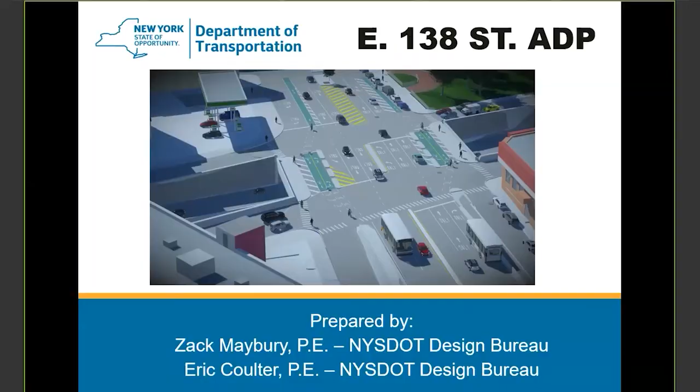So as everybody knows, this is the project location. You can see where my mouse is here. This is the subject bridge replacement, East 138th Street over the Major Deegan. You got the Major Deegan running north to south here underneath. To the west, we have the Madison Ave Bridge.

I'm not going to go into model-based contracting in too much extent, but I do want to give a high-level overview of the process, in case you've never heard of the term before. Model-based contracting is specifying contractual work with a variety of relevant electronic files. You'll hear me keep saying the model and the 3D model, but it's not just that - it's also CAD files, Excel files, alignment files, XML. It's really whatever electronic information we can provide contractually with the plan set that provides a better contract.

Let me see if I can mute this person quick. I'm all right, you know. All right, I think I got him.

With that being said, the overall intent is to reduce or eliminate the corresponding 2D plans. It's not just plainly jumping into this and eliminating every 2D plan that existed prior. We've taken a high-level approach and tried to determine which elements should be provided in the 3D model, and what would really provide a benefit to the contractor and any reviewing agency. It would be very easy to add all this information into a 3D model, but if that's not the easiest way to access it, or if it just makes more sense to have on a 2D plan - such as work zone traffic control, showing simple elements like lane shifts, tapers, closures and work areas - 2D plans still do a wonderful job at showing and demonstrating that information.

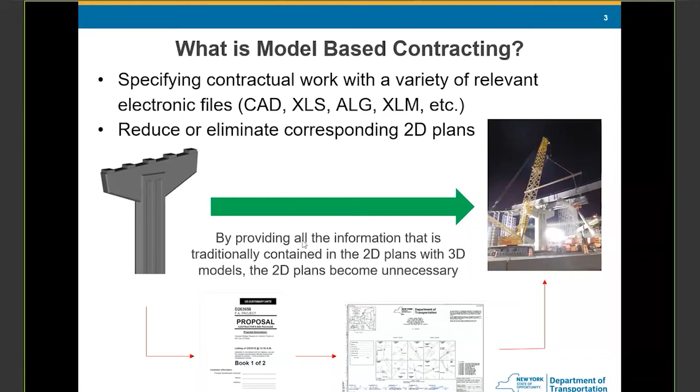The way we went about creating an engineering stamp for these electronic documents - you'll see as part of the plan set accompanying the model, there's a sheet called Electronic Files Identified as Plans, ELE is the drawing number. On this sheet, we list out the different files that will be provided contractually and electronically with the plan set, along with the engineer of record. When this project is put out for letting, each of the respective stamps will be on there as well. This should give you a good overview of the different files that will be provided.

Looking down here at the federated file, this is a supplemental file that we are providing. Federated - what does it mean? Federated is a new up-and-coming term in the CAD environment. It means to form a single centralized unit within which each state or organization, and each organization keeps some autonomy.

So what does that mean? We have each of these contractual files, but what if I want to see more than just the contractual highway work? I'd want to see how the bridge is integrated with that, and potentially even some of the utility elements as well. That's why we created the federated file - it's essentially one-stop shopping, and that's what I'd really recommend for reviewers to open and conduct their review in. The federated file simply references each of these contractual files and puts it in one central location that allows a user to access the information they want, and they can get rid of any information they don't want to see. We'll go through a quick demonstration on that as well.

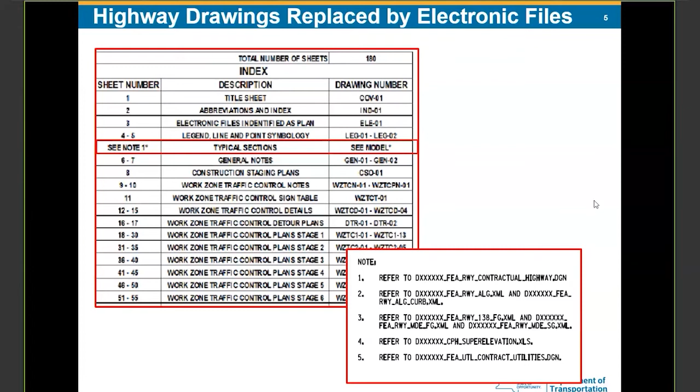So we've included some preset saved views in the model. These are essentially set camera angles that have particular elements on, so that it enables the reviewer to quickly dive into the information they're interested in. You'll see when I pull up the model, there's an overwhelming amount of information if it's all on at the same time. And if a user is looking for something specifically, it would take a lot of work to get to that single element.

So with that in mind, we set up these specific saved views that a user can browse to and quickly retrieve the information they're looking for. You'll also see the saved view list in the model-based contracting special note. I'll touch upon that in a little more detail once we go into the specific files provided with the project. We've also included embedded links inside of the 3D model.

You can picture these as a cell or an emblem inside of the model. For something like a PDF, you'll actually see a PDF icon pop up. I'll go through a couple of examples of these as well. And that PDF icon in the model will directly open the associated file.

For example, if I click on the link to the carrier beam data, I don't have to browse to a listing of 100 different files and try to find the carrier beam data associated information. I just simply click on that link and the Excel sheet or PDF will pop up instantaneously. These are also all included in the special note.

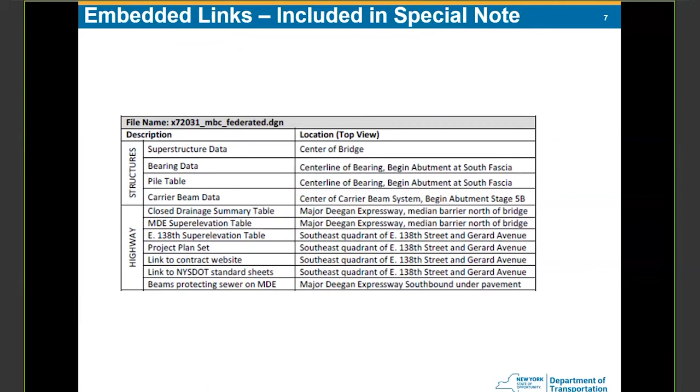Also, part of the special note is our required software to view the model. You'll see that we've provided reviewers two different methods to review the 3D model. One method will be Bentley View. That's my preferred option as a longtime CAD user. It feels very comfortable for me to access the model and look, measure, and get the specific information I'm looking for. However, we've also provided a method called iTwin.

That method uses a link to a Google Chrome web page that enables a user to bring up the model and access it just like you could in Bentley View. However, you don't have to download any software, and the overall feedback we're getting is that it's more user-friendly to someone completely unfamiliar with the CAD world. And that's how Bentley went about setting up that product.

We've created some training videos for Bentley View. Those are on our YouTube page, broken into specific videos. We try to make them 1 to 2 minutes apiece so that they're very detail oriented. You might hear me say something today about levels, but you don't really remember what it was.

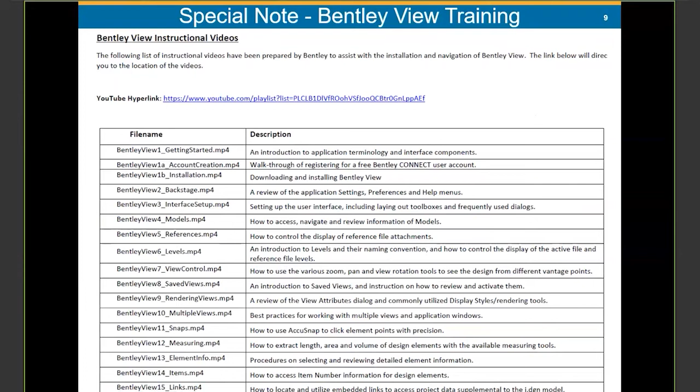And you don't want to watch a 30-minute video to try to find that snippet of me talking about a level. You can just go to the Bentley View video that talks about levels, boom, you get it. We try to make them short and accurate because attention spans aren't nearly what they used to be, and if somebody's got to watch a 30-minute video, they're likely not to. So we've actually included these on our other pilot project as well, and we got a lot of good feedback from contractors.

So now that we went through that information, we're going to do a breakout from here. I want to go through the different files that were provided with the ADP submission. Hopefully this provides some more clarity on the different files provided, as well as answers any questions people may have who already accessed the files online externally.

And I know a lot of people are on this phone call internally as well, and those files will be located on the P drive. Two of the files I'm going to talk about in a little more depth are the quick start guide. I think that's very important for every reviewer looking at this package. It provides a lot of valuable resources, information, and guidance so you can get the best experience from your review, and it answers a lot of questions that people have right off the start.

Secondly, the model-based contracting special note details the level of development for the various figures, shapes, and solids included in the 3D model, as well as what information we can get from the model and what information you should refer back to, potentially the standard sheets or the 2D plan set.

I really want to recommend every reviewer go through both of those documents in their entirety before you start your review, because it's going to answer a lot of questions and hopefully provide more clarity for you during your review. After that, we're going to talk about the 3D model.

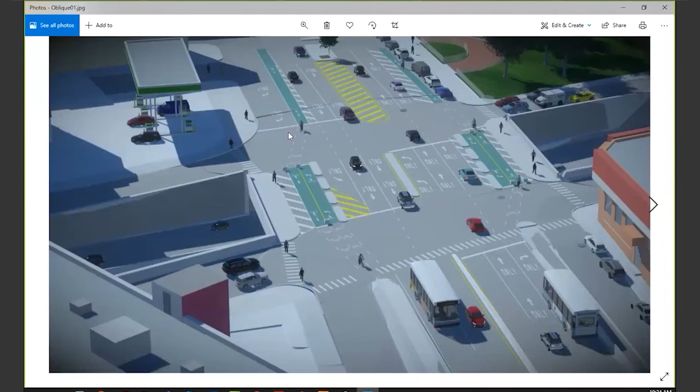So quickly going through some of these documents that you will receive, you have a folder with renderings inside of them. We put together a few different views so that a user can better understand the final condition of our project.

We have the federated file. I'll go into that in a moment when I bring up the model. You have your HC140s, that's for your utilities, and your utility inventory report, that's your HC203.

Like I said, we did provide a 3D PDF that Eric will discuss in a little bit. This is a tutorial on the best practices to use. I think a lot of people are going to like that 3D PDF because everybody's familiar with accessing a PDF.

Not everybody's familiar with accessing a CAD file or a model, and I think that's going to provide a lot of clarity and help get users acclimated to the project. It's really easy to use, and it's got a similar look and feel as if you were in CAD.

I'm going to come back to this quick start guide. Like I said before, I highly recommend viewing this document before you look at the project. This is the actual 3D PDF file. We have the corresponding 2D plans with the project in here as well.

We have our special notes. I'll also come back to this. We have our special notes that are related to the different elements of work in the project, and we also have the model-based contracting special notes embedded in these as well.

And I'll also come back to those. We've included the different special specifications that we've utilized on this project.

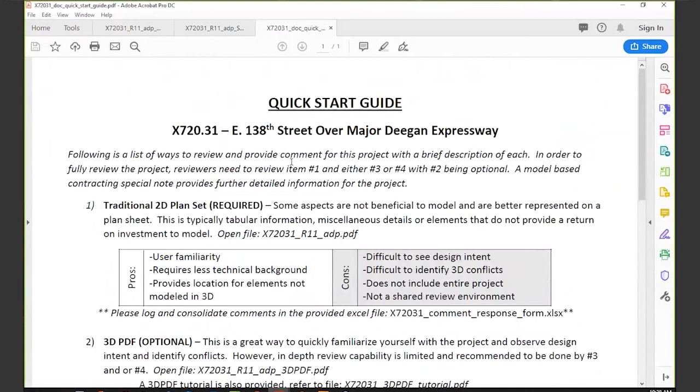So let's go through the quick start guide. This is going to take a user through their course of action on how they should conduct the review. We really wanted to provide this so that you weren't going in there blindly, and this is going to answer a lot of questions.

So the first thing you should review is the 2D plan set. This is going to be a required portion of your review. That's the file right there. Some users are very familiar with 2D plan sets, less technical background, but it's difficult to identify any 3D conflicts, especially with all the utilities on this project, and it doesn't include the entire project. You really need both the 2D plan set and the model together to form a full picture of the project.

This is an optional element, the 2D or the 3D PDF element 2 here. Like Eric was saying, this is a great way to quickly familiarize yourself with the project. I think a lot of users are going to be able to pull that up and feel very comfortable with that document because it is a PDF.

There is a tutorial on the different functionalities you can do inside of that 3D PDF. I would recommend you look at this before you pull up the 3D PDF and use it by the side as you do your review.

But again, it does have its cons. It's not intended to get your quantity information. You're not going to be able to quickly get how much cut and fill is on the project. It's not super easy to turn stuff on, turn stuff off. You can't place 3D comments in there, like you saw this drainage structure that's not in the right location and you want to comment on it. That functionality is not in there.

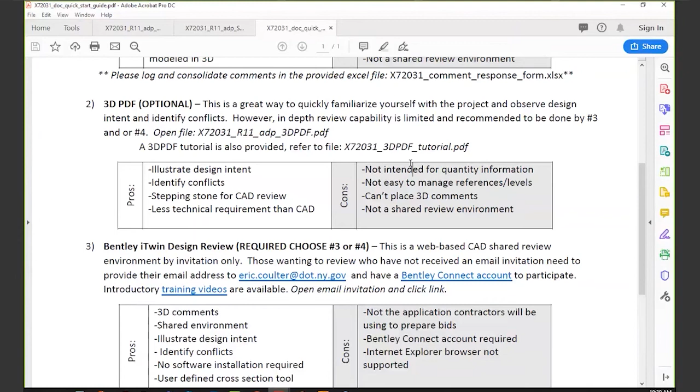So then there's a choice between items 3 and 4 for the model portion of the review. Once again, you have the choice between the iTwin, which would simply be pulling up the link inside of that review document and accessing the model on Bentley's website, or you have Bentley View.

This was one of the things I want to point out again. Those wanting to review that have not received an email invitation need to provide their email address to Eric. He'll quickly get you added. You'll create a Bentley Connect account on your own. And we've also made sure there's some introductory training videos available.

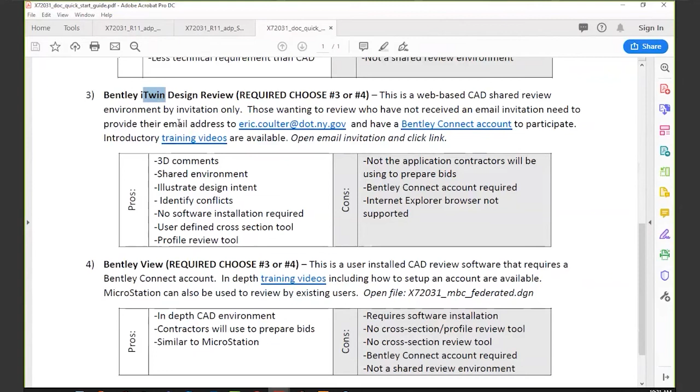I think a lot of users will feel very comfortable using the iTwin review because if you don't have a CAD background, if you haven't used Bentley quite a bit, this is a web portal. You don't have to download any software. You just need to have an account made free of charge quickly, and you can quickly access the model like it was on your C drive. There are some pros and cons on there as well.

And then lastly, we have Bentley View. Here's another link to our training videos, and here's the file that you need to open. Like we were saying, it does require software installation.

So I'd like to go to the special notes that were included with the ADP submission next. You have a lot of the different elements that are normally included with this type of project, stuff from super pave to noise control, but you will see this lastly, the model-based contracting portion.

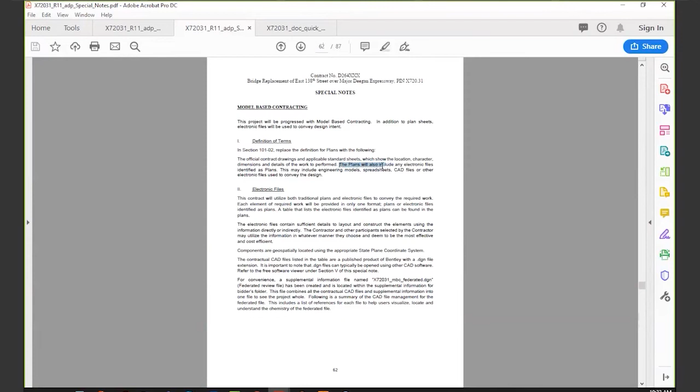So let's go to page 62. You'll get into some of the different definition of terms. We've revised New York State DOT's Division 100 of standard specs because originally the definition of plans prohibited the use of any electronic documentation. And of course, with this project having a heavy amount of deliverables in electronic format, we needed to overcome this. So the definition now reads that the plans will also include any electronic files identified as plans, and this may include engineering models, spreadsheets, CAD files, or other electronic files used to convey the design.

This shows you a breakdown of the different files that make up our federated file. Notice that D numbers are the contractual file. You'll also notice contract in the title, whereas you'll have a PIN, that's the project identification number, and supplemental for files that are simply supplemental provided in the 3D model. That's one important thing to take away as well.

Contractual information is blessed the same way as if it was on a 2D plan set with an engineering stamp on it. Supplemental is purely for creating a full picture for both the reviewer and contractor, like how you would include a record plan set. It's supplemental. Please don't build from this set, but we want to include it because we think it's going to provide additional benefit.

Here's the structure of the references inside the file. Like I was saying before, all of the saved views that you're looking for are located right here in the special note. If a user simply wants to see the abutment, what's taking place during stage 2B at the begin side, all you have to do is navigate to this saved view right here, and it's going to show you that. Out of everything in the model, that's what it's going to bring up for you.

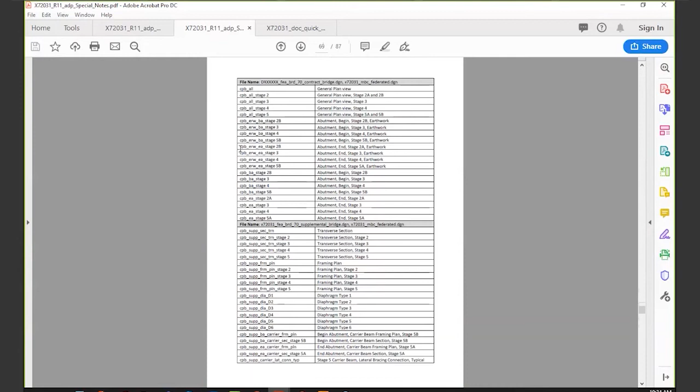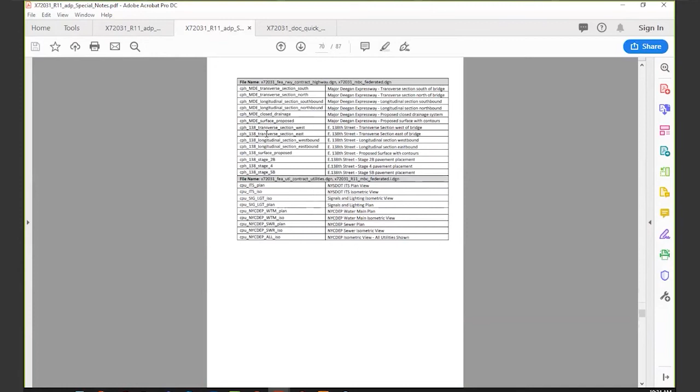Just a quick overview. You have CPB, that stands for Contract Plans Bridge. Those are going to be more bridge elements. You also have CPH, that's Contract Plan Highways. Likewise, you're going to see more of the pavement and drainage work. And then you have CPU, which is your utilities.

Here's some of the different embedded links that were included with the model. We get into the level of development. I don't know if anybody's familiar with that. That's a big term used in the BIM world.

But this is really where you get into the main content and purpose of the model-based contracting special note. This tells the user what information they can retrieve from the model and what information they need to refer to, potentially a standard sheet or the 2D corresponding plans.

So let's go to substructure concrete quick. Each pour of substructure concrete is modeled as one solid 3D element. The level name coincides with the pour number. The following information can directly be obtained from the 3D solid model: elevations, northings, eastings, components, distances, areas, volumes.

However, the following information is not contained in the 3D model. You've got your chamfer details, your keyway details, water stop details, and I need to look at the bridge plan sheets for that information. I shouldn't look for that in the model.

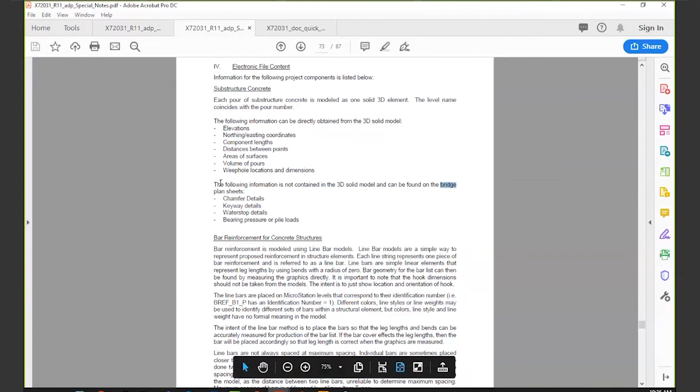That's why I'm saying it's very important to look at the special note before you look at your review, because a user might be like, why is there no chamfer details in the 3D model? Why is this missing? And that same message carries over for every element inside of that 3D model. We try to really break it up - there's not 1,000 different details, but we do break up each respective element in here.

You'll notice here on page 86, here's the link to download Bentley View.

And here is another link to our YouTube site that will pull up the training videos. This is the link that you'll navigate to if you decide to download Bentley View. Very straightforward, just like downloading, accessing any other software that you would download.

Here are the videos that we have on our YouTube page. You can pull up any one that you want based upon the information that you need. They're not terribly long, but I would recommend going through all of them just because it would give you the best chance of succeeding at your review with running into the least amount of problems.

These are definitely, from video 1 to video 3, essential for every viewer that plans on downloading the software, because it really takes you through downloading, creating the account, getting it installed, getting your preferences set up, so you can take it from there.

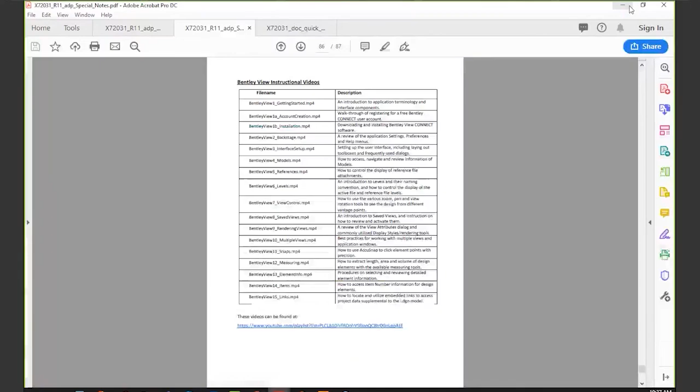All right, so when you load Bentley View, this is the page you will see. You're gonna wanna make sure that your New York State DOT standards is clicked from here, and likewise, your work set is New York Highway Design. That's gone over in those videos as well, but I just want to reiterate it as being important.

It is in my recent file, so I will access it from here. I also want to access it from that folder that we downloaded off the FTP site. So once I unzip that folder, you'll see that you have all these various files in here. The next thing you should do is just go to the README.

The README states to only open the federated file. That's where you can get your one-stop shopping like we were talking about before. If you have Bentley MicroStation on your computer, you can open it using that method as well.

Internal users, if you didn't have MicroStation, we made it so you could download Bentley View from the Software Center. All the files in this folder need to stay in that folder for the references and embedded links to work properly. So try not to remove or change anything in the file.

Part of the setup is running the configuration file. That gets your settings correct so that you're viewing the shapes, solids, and pavement materials correctly, and so everything looks correct. This is also covered in video 1B at minute 1:45.

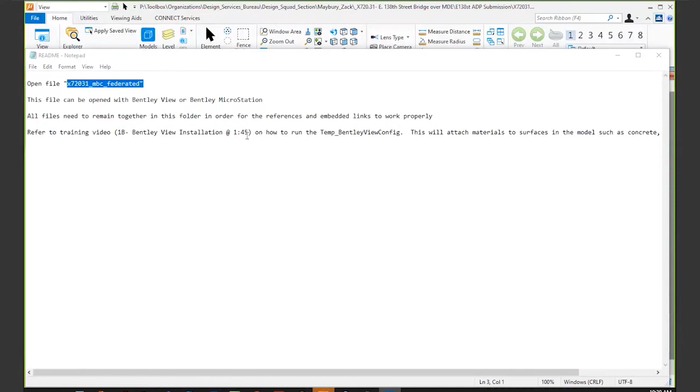So I opened the model here, and you can see, like I was talking about before, there's a lot of information in here. We have the buildings that will help orient a user to the north, but you can see a ton of contours. We have some of those links like I was talking about before.

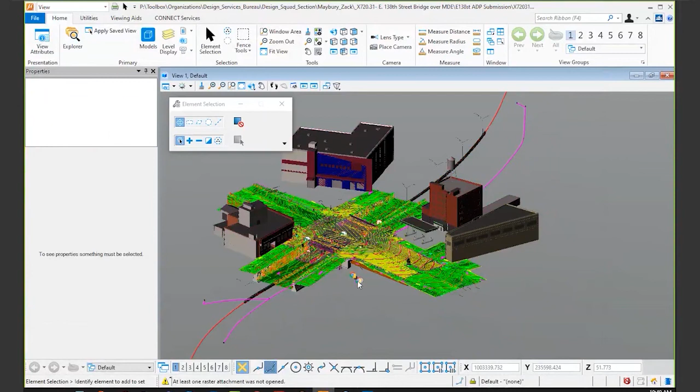Here are those links. These open up web pages, of course. You have some other ones over here, an Excel document, and you've got a PDF document over there.

I could see this being a daunting task for somebody not familiar with opening up a CAD document before. So I just want to get some of the settings set up for your initial time. You're going to want to have your properties open.

That's this box right here. By having that open, when you select an element, it will tell you all of the relevant information for that element.

You're going to want your coordinate system up, the AccuDraw. This search ribbon up here is very helpful for anything that you're looking for. So we want to pull up the AccuDraw.

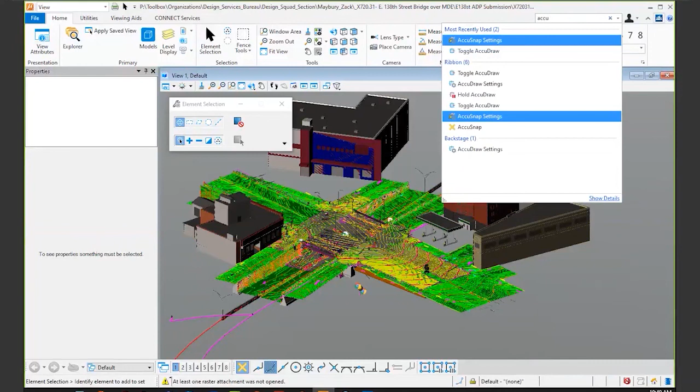Sometimes when that comes up, it won't be an XYZ, it will be in a polar format. So you can see we have an angle and a distance in lieu of XYZ. You're just going to want to click on that and click the key M, and that will get you to your XYZ, which is your grid location.

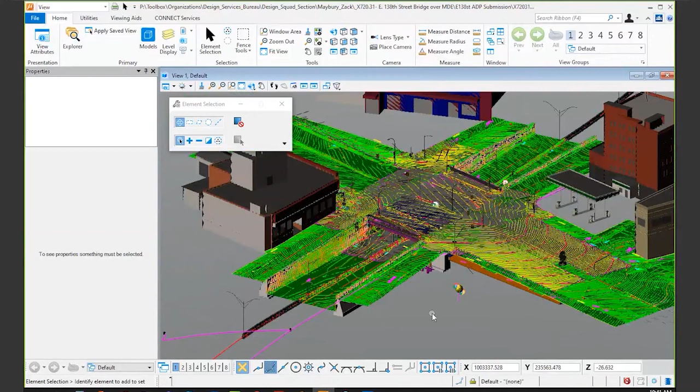That's your elevation, your northing and easting. So if we go to any point and select that, you can see the corresponding information - the Z, the X, the Y - and depending on the element, based upon reading that special note, you know that's accurate per contractual data, or if that's something I should get from the contractual 2D plans.

Some of the other settings - you're going to want to have your snaps set up. These are called AccuSnaps. All you have to do is go into your search again and click on snap mode. These enable you to click on a variety of elements at certain predefined points. Key points allows you to click on only the begin, middle, or end point of a line.

Near snap allows you to select any point. For most uses, you want to measure from end to end or end to center. I would recommend using this key point.

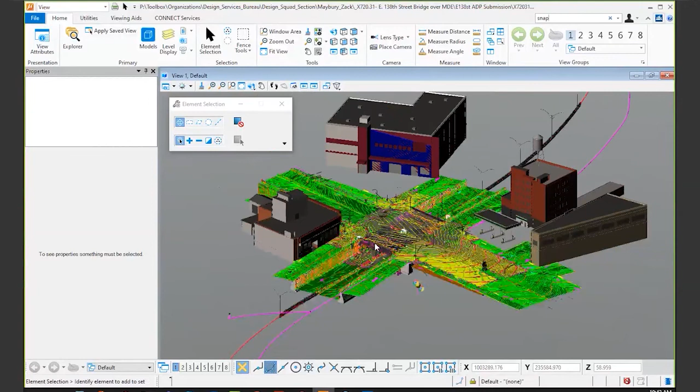Here's your different view toggle techniques. You have your rotation, view previous, zoom in, zoom out. You can also use your center tracking wheel for zooming in and out of the model.

Some of the other important things are your display levels. You're going to want to have this so that you can functionally know what some of these things are and be able to turn stuff on and off. There's different levels in here, and by putting stuff on different levels, it allows the user to turn off stuff they don't want to see and turn on stuff that they want to see.

So if this description's not up when you pull up Bentley View, just simply right-click, click description. A good example of how that's going to benefit you is if I click on a line, you can see that in the background there.

The level that it's on is simply UFO. That literally means nothing to most people, but if you go in here to the description for the right file that it's on, you'll see that that stands for utility fiber optic underground. You're going to get more from that by selecting it via the level display in lieu of just UFO.

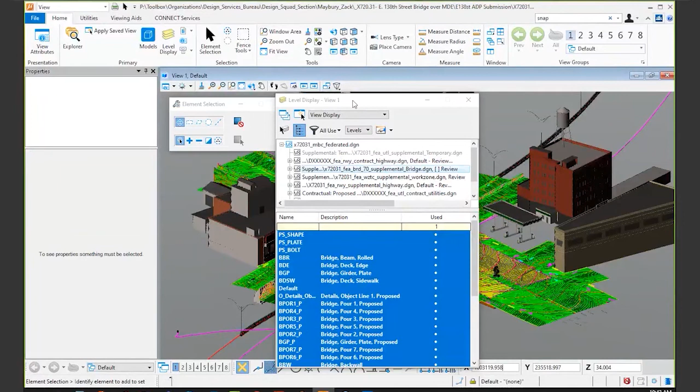So definitely recommend having two screens for a review, but it's not essential. A lot of these tools can simply just be docked off to the side and accessed when needed.

Your next course would be opening up your reference dialogues. Give that a second to load.

All right, it's on my other page here, and I'll bring that over.

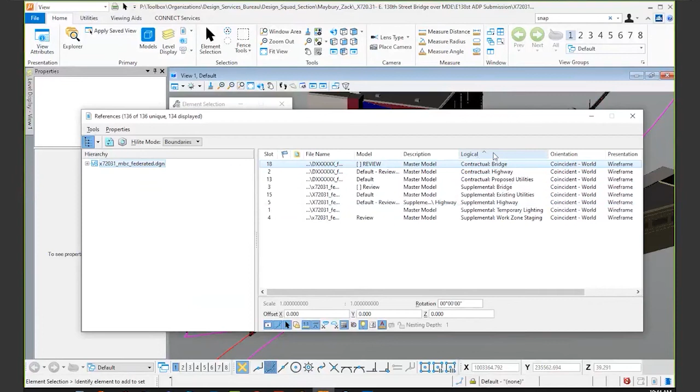First thing, when you open your references, these refer to each of the contractual and supplemental files. You'll notice there's not much information actually inside the federated file—it's simply pointing to other files and bringing in that relevant information. So when you open references, I'd bring logical all the way to the front. This way we can sort by column and quickly tell, okay, here's my contract bridge,

highway, and utilities, and likewise, here's my supplemental information. To toggle this information on and off, you'll want to bring this over so it's visible—that's the display dialog. We can see that if we click this stuff off in here, it's also turning that information off in there.

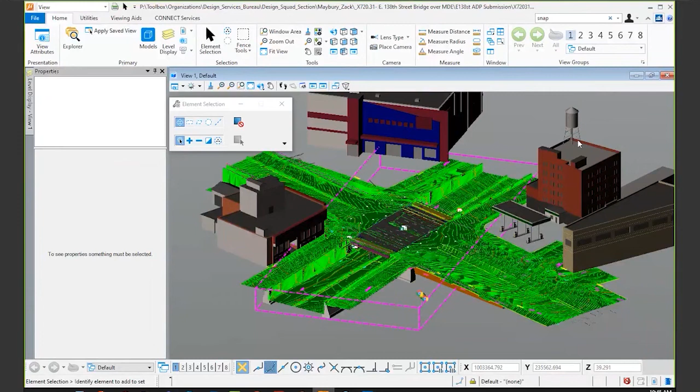And then there's also the tree if we want to get down into some of the references below. Pull back the reference dialog. If this isn't open when you pull up references, you'll just want to click on that, expand it out, and expand the tree. This shows the hierarchy of how things are associated.

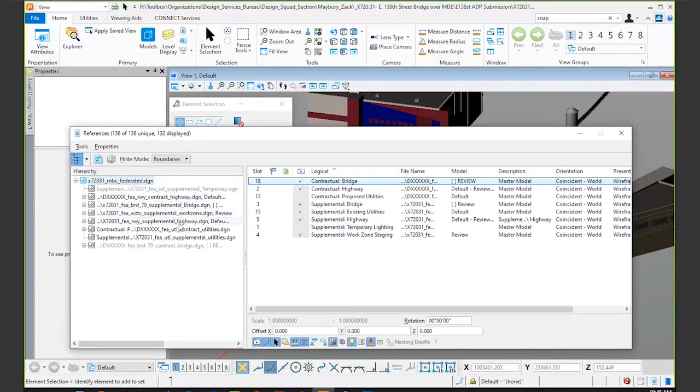Let's say I want to go to the supplemental work or highway stuff and turn off the base mapping. I can just turn off the base mapping, simply by clicking on that and turning it off here. Another important thing is you can't break this. You can get as confused and turned around as possible, but you can't break it.

So you don't have to worry about that. If you accidentally turn something on or off, or change the view in any way, we set up different saved views so you can go back to what you were looking at. I'll show you an example of that afterwards.

So that pretty much takes me through the main things you're going to want to have set up for your review. The next thing I want to jump into is the saved views. This dialog box will pop up right here. You'll see the same saved views that were listed in the special note.

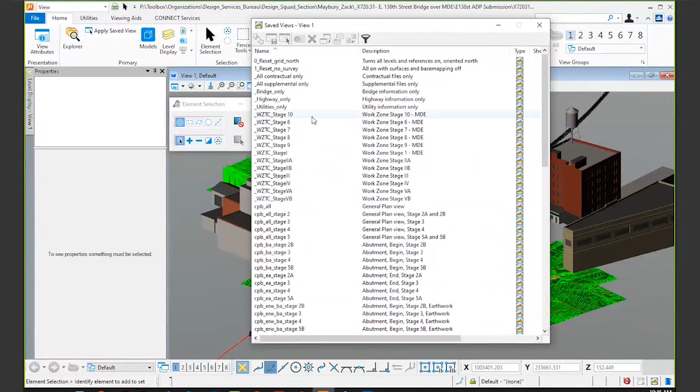Included here, we have some for work zone traffic control, some for the bridge, and some for highways and utilities likewise. I'd recommend just sorting by name so they're all in chronological order. Like I was saying before, there's a lot of information in here, and for me to turn off every specific link, level, and reference to look for something, it might take a lot of work. So we set these up ahead of time.

A good example of this is the work zone traffic control. We included these just so a user can understand in the 3D environment what the lane shifts look like. This is purely supplemental so a user can see this in the model, because we do have the contractual 2D plans to cover this information. But of course, if you're in the model, you want to see how this corresponds to the bridge out there. So we'll just double click on that saved view.

We'll apply the saved view. We want all of these selected, and then we'll just left click, data point, accept, and you'll see that now we have the stage 2A lane shifts in here, and we can see the setup. We've got the work zone over here. I'm going to navigate to stage 5 now.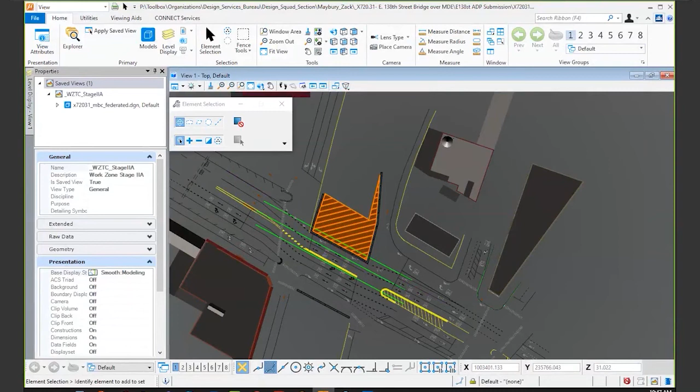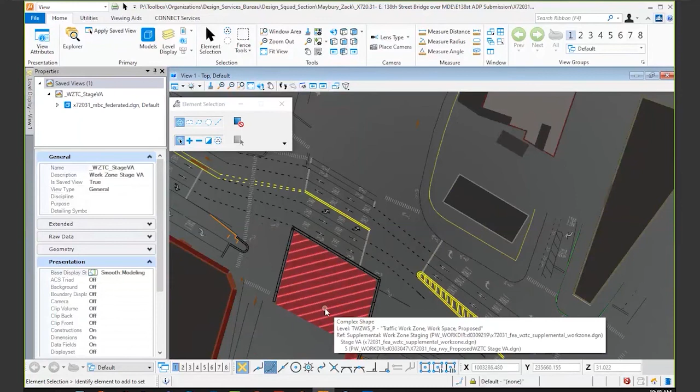Let's see what's going on in work zone stage 5A. So now we can see that the traffic's been shifted up on the north side. We see these lanes traveling west to the Madison Ave Bridge, and these lanes traveling east. We have a turn bay, and this is the primary work environment. We didn't have to include this in the model, but we thought it'd be really beneficial to see this type of information in the model as well.

Some of the other good ones are the bridge stuff here. Let's go to the lateral connection. So we have a big carrier beam underneath the abutment supporting it, and it's got some fancy connections on it. To get to this part of the model, you'd be talking about turning off upwards of 50 levels, but I can quickly just navigate—I did that on the other screen to this reference—and see how that bracing is.

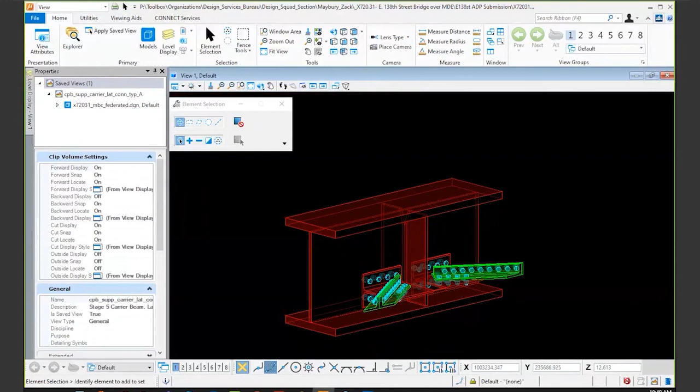And likewise, for some of these other stages, I have the abutment for stage 5B, and this is going to be primarily focused on the earthwork. Same thing, double click on the view, left click to accept, and we can see now, with our element selection command, that we have this solid in here, bridge excavation. Notice the properties is where you're going to get all this information from—we have the structure excavation clearly identified in here, and the item number that it's going to be paid for.

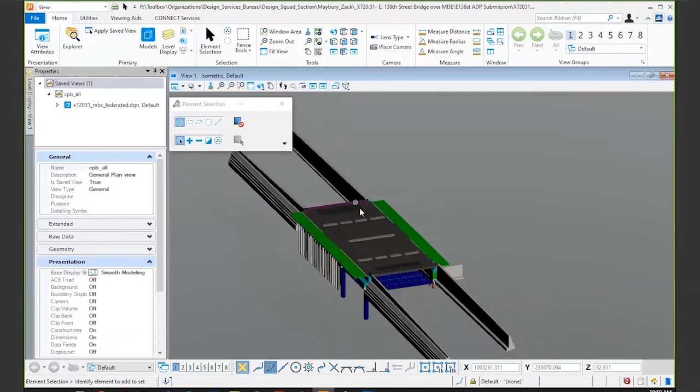But let's go to another view that might be of interest, the various types of diaphragms that are included. If we just go back to the whole bridge contract plan, we can see right now that there are no diaphragms in there. I'd have to take off the deck and remove all this information to see underneath.

Just because we're here right now, we know there are utilities on this project, so let's turn those on to see how those interface with our bridge. We can go back over here to our references, and back up top to our main part of the tree. Give it a second to load.

Let's turn on our proposed utilities now. You can see that we just had our bridge on before. Let's turn on the existing utilities too, just to see how these elements come together in a 3D environment. Now that I've turned those on, we can see that we've added all this additional information in here. We can see we have this sewer system coming through with these different manhole risers.

We have traffic control elements, and all the user has to do is hover over that element and they can see what that is. For example, this is a sanitary line underground. And like I was saying before, this might be too much information for what I wanted to see. I was really just concerned about this.

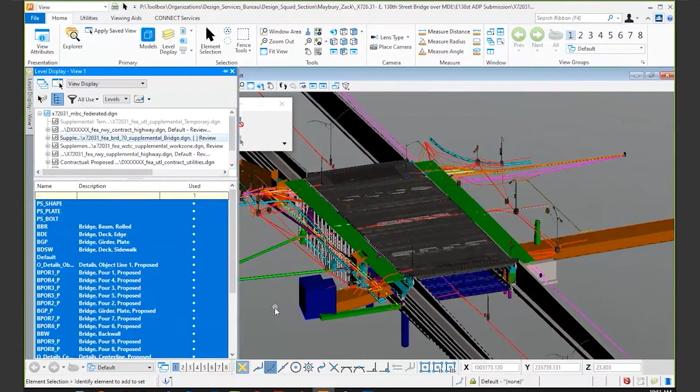So we can go into the level display and click this box right here to turn off levels, or we can just hold the right click, go to level off, and start getting rid of some of this information that we're not interested in. We'll get rid of that, we'll get rid of that. We got a water line, let's get rid of that.

You'll see that in the special notes, this magenta color is elements that are going to be abandoned or removed. We didn't want there to be a duplication, so users could quickly understand between what elements were going to be abandoned and what are going to be the proposed and existing differentiation.

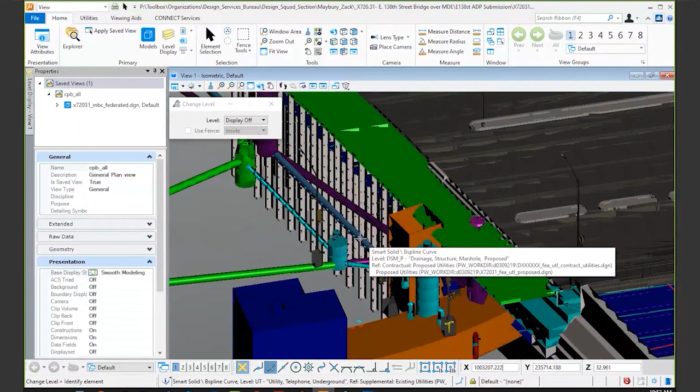Likewise, I can just continue to turn off stuff that is not what I'm interested in, the telephone line, all of this information. And now we can see a much better picture. Oh, I'm not interested in the luminaires or signals. I can turn all that off and get the picture I'm looking for.

Like I was saying before, if we just want to go right back to that, just the bridge, all I have to do is click on that bridge, save view, and boom, we're back to that. Even though we turned off all that stuff and turned on different references, we didn't hurt anything. We can always go back, and we've included a couple at the top just to get you back to everything being on with the grid north, and then another reset.

One second, I'm going to mute another person here.

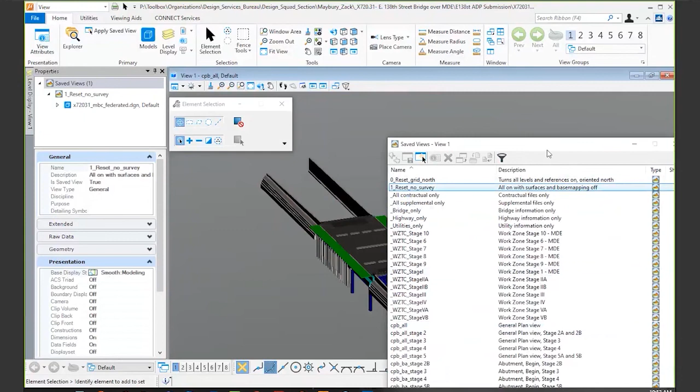All right, perfect. And this will get you back to your starting point. Don't be nervous that you turned off too much stuff. It's going to happen. You're going to get rotated into a position that you're not familiar with, and you want to get back because you have no idea where you are. That's another good element, let me cover that quick.

When I go to the rotation command, we're going to go to dynamic rotation. I can select this cursor and put it on any element, and we'll revolve about that. So we can rotate around, but this is going to happen, right? We're going to be looking like this and have no idea what happened. All we have to do is go back to that contract bridge, all on, and we're back where we were.

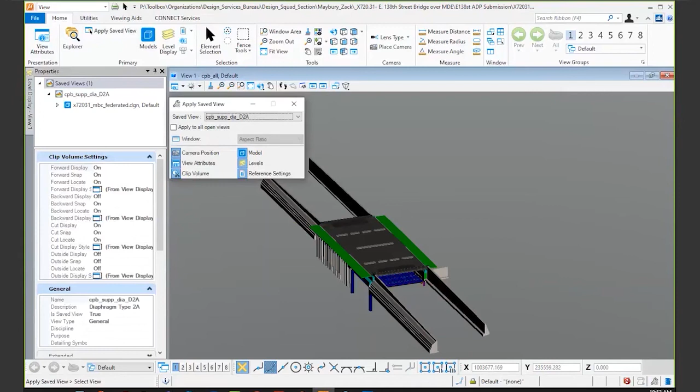I want to dive into those diaphragms again real quick. You can see just by the amount of information I'd have to turn off to see a diaphragm. I could just go to diaphragm type 2A from the save views, and that's it right there. That's the information I was looking for.

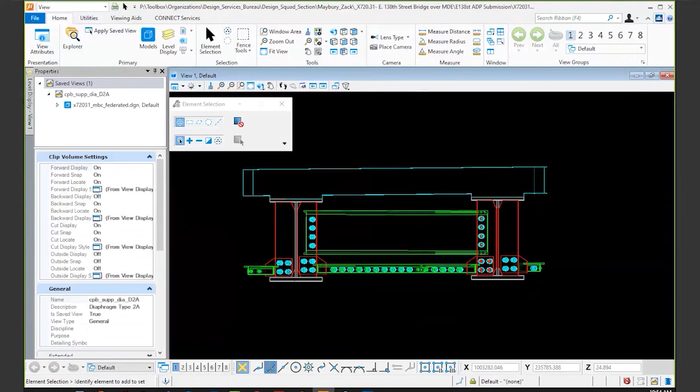I'm going to go through a couple more. We have our highway save view in here. We got an MDE, Major Deegan, and we're doing a little bit of pavement recon down there, PCC pavement, and I want to see a longitudinal section of the southbound.

Okay, we can see we're replacing some drainage structures in here. What's going on with that? What's the item? How are we paying for it? All I have to do is select that drainage structure, and I see this is a type F structure. I see the corresponding frame and the corresponding grate for it.

Likewise, I see we got a curb going in here. What type of pavement do we got? So let's select it. Okay, we got PCC pavement, it's heavily reinforced. This is how we're paying for it.

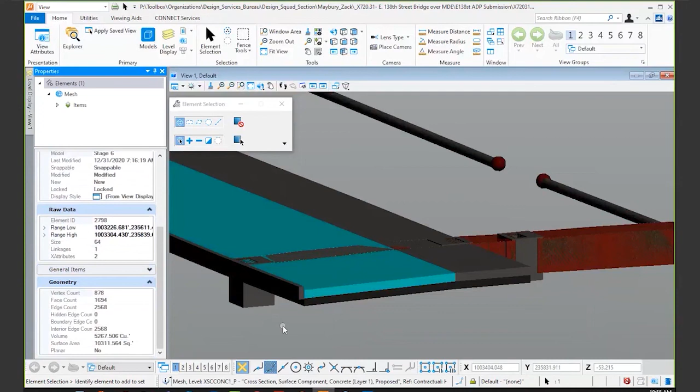And then we have the corresponding information for that solid right here as well. We have a volume, we have a surface area, and we really saw the positive effects of that when the contractor was bidding on items. They could quickly navigate to an element and the pay item they needed to provide pricing for.

So let's go to a utility save view quick. Down here at the bottom, we have the save views. I want to see a New York City DEP sewer isometric view. Perfect, I'm not interested in all the other stuff, I want to see that. So I double click, I click accept on the screen, that's a left click. I'm going to move this off for clarity. All right, let it load up.

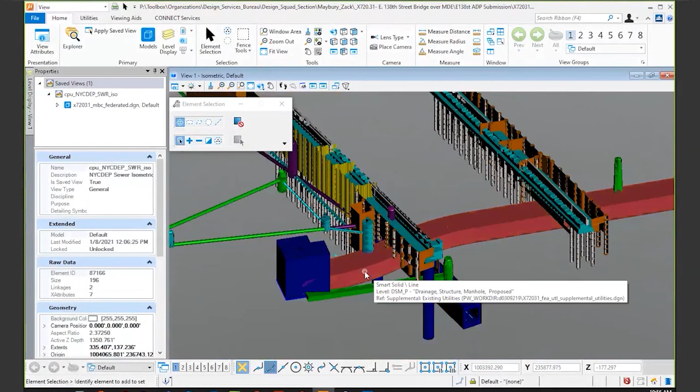And now we can see here's the sewer, here's some of the New York City DEP entities. We have how we're abandoning this sewer location, and this is our new proposed location right here. Just by hovering over it, you can see that this is a drainage feature right here, this is a combined system, this is a regulator. Like I was saying, all that information is right here and readily available for a reviewer.

So some of the other stuff, let's just see all of the utility elements. So I went to the utilities only save view. We can see all of the various items that are included in here. We saw enough, let's go back to the main view and get a good overview of the project.

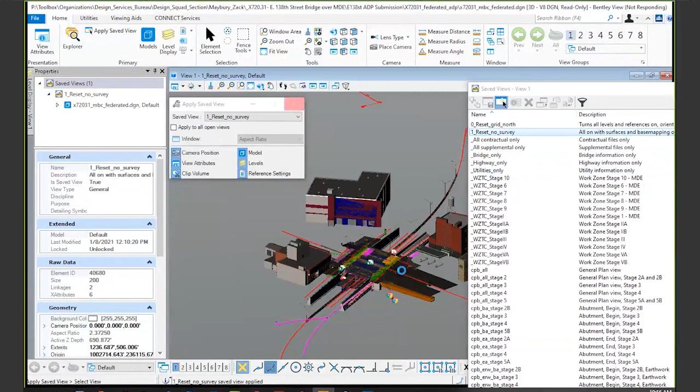So now that we're back at this position, let it load for a second. Let's go into some of these embedded links. We see that over here, I got a PDF, can't really tell what that is. Let's go ahead and rotate over there. Remember, we just move the cursor, select it on the corner, and we're just going to rotate around.

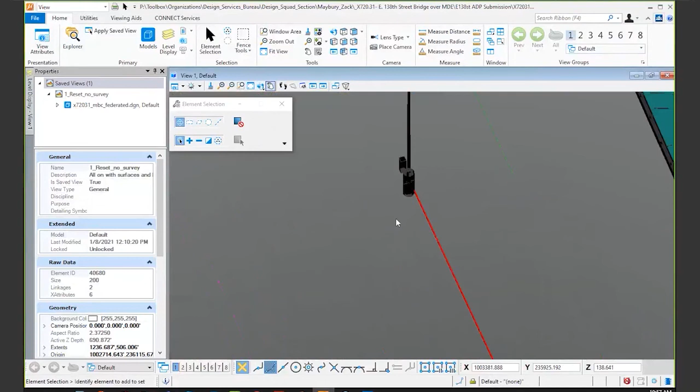Okay, that looks like it's on a drainage structure. What documentation we got there? So I'm just going to hover over that. It says we got a data drainage table. Okay, let me go ahead and open that file. Instead of having to navigate through a ton of different files to look for this, you have the drainage table right here for your use. You can see the slopes, lengths of pipes, and the various nodes that were utilized.

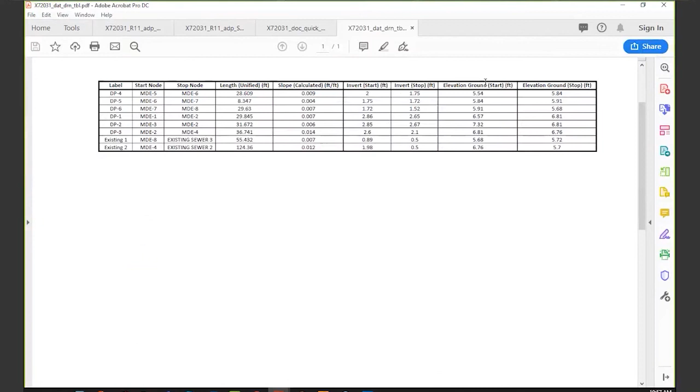And once again, I can see that drainage structure, but how's that getting paid for? You have that information right here. And that really covers a lot of the different elements.

If you click on a luminaire here, you can see I can select it with the background, and you have that information right there included. That was one of the techniques that we used to overcome the fact that we would simply just call this out with an item number on a 2D plan set, but with this being in 3D, we don't really have that opportunity. So that's the way we plan to convey not only information like that, but you'll see on some of the various elements we've included designer notes.

So all you have to do is select the object, and you will get more information over here. You'll see different stuff as far as the volume for specific excavations or pavement placements, or some things such as item numbers, or bringing the reviewer's attention to maybe a record plan set.

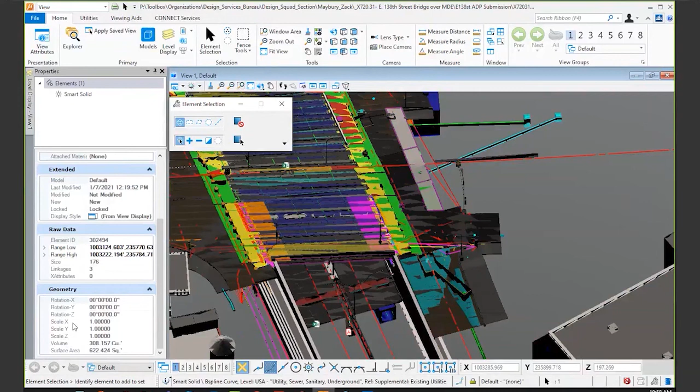So, Eric, I think that pretty much wraps it up for what I wanted to cover. Can you take control and go into the 3D PDF in iTwin from here quick?

I think I muted everybody, so I might have to unmute them. Can you hear me, Eric? Yeah, sorry, I didn't mute everybody.

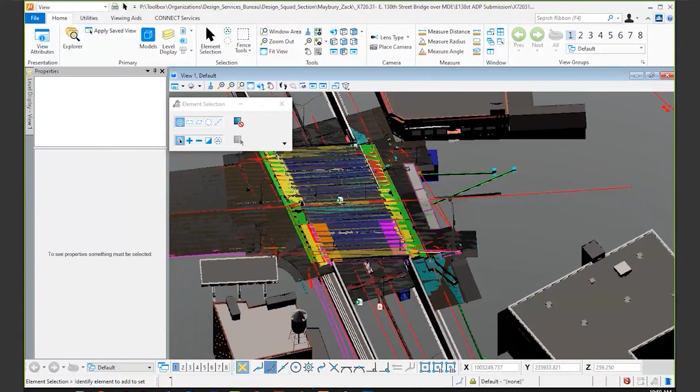Just to reiterate, this is a good place to come back to make sure you got all the required information you need. So item number one here, this is typical, this is what we traditionally deal with. And on our first pilot project, we offered Bentley View as a way to review our model.

You'll see we've since added a couple additional methods for review. These are kind of just feelers. We're piloting this Bentley iTwin design review with this project. We're just looking for additional avenues to review our design and to offer reviewers additional ways to look at it.

That 3D PDF, as Zach mentioned, is a great way to just get familiar with the project, and I'll cover that in a second. Just to help us going forward, Zach mentioned the questionnaire. Please do fill that out just so we know if these things are helpful for you guys to do the review. We want to streamline this process and provide reviewers with the best information possible to conduct their reviews.

So with that, I'll jump into this 3D PDF tutorial. We didn't want to just throw a 3D PDF in your lap and have you try to figure out how to use it. So GPI put together this 3D PDF tutorial on how to get set up in here.

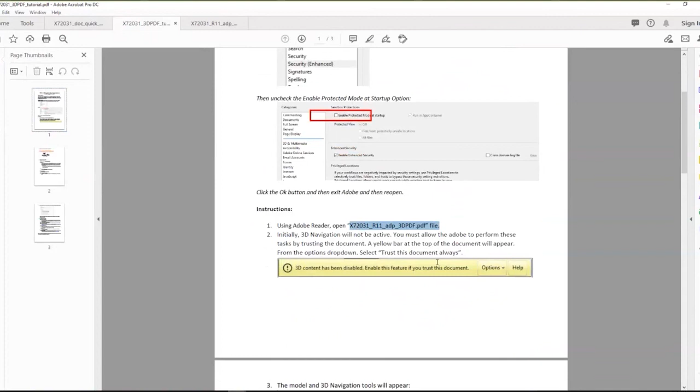There's a couple settings that you're going to have to apply, and you'll see when you open this file, your 3D PDF file, you'll be hit with this trust document prompt. If you just go in and click options and trust it and give it a few seconds, it'll load up and you'll see what I'm showing here, and you'll get all your navigation tools up here on top. This document just goes through what all these toolbar functions are, and it's another good reference once you get in there.

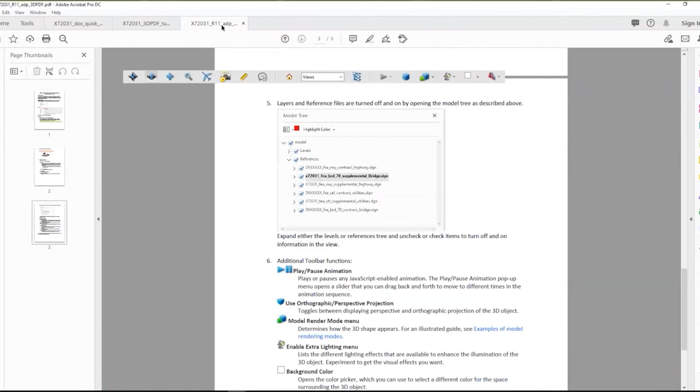So I'm going to go ahead and pull up this 3D PDF, and this is what you'll be looking at once you get into it. This is printed right from our federated model. So what Zach just showed you in Bentley View is what you're going to see in the 3D PDF. As he mentioned, PDFs are pretty standard in the industry and everybody's pretty comfortable with them, so it's just another thing we wanted to try and see how it worked out for everyone.

I'll just go over a couple of things here. You've got your panning and your rotating commands here, and if I just click on that, I can rotate around the model pretty easily.

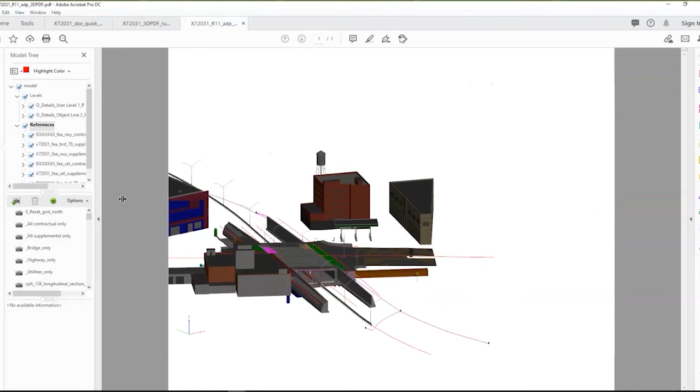Another thing that you're going to want to have at the ready here is your model tree. If you click on that, you'll notice over here on the side you'll get a list of all the levels and references in the model. So kind of what you saw in Bentley View, where it creates this model tree as to how this federated file was assembled. You can turn stuff on and off in here, and if you don't want to see all that information, you can isolate and just get down to what you're looking for.

You can zoom in, you can pan around, you can change your renderings, how you want to see it, whether it's a wireframe or a smooth model, which is shown here.

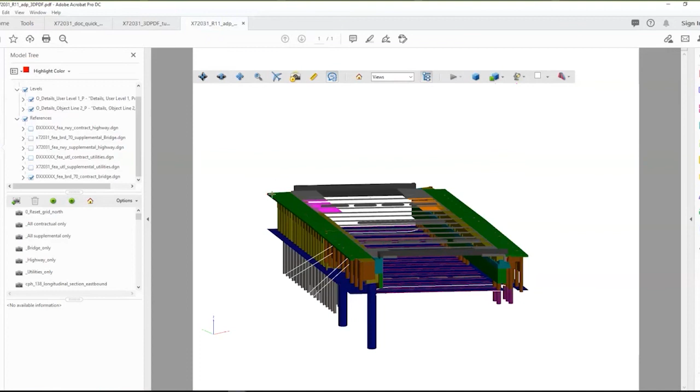The other thing that you can do in here is place comments, 3D comments. So this is another acceptable way to comment on this project. You can just come in here, you can snap to an element and say whatever you want, hit OK, and it'll place the comment. When you rotate, you'll see your comment kind of sticking with you, and then you could just go ahead and save it and submit that as part of your review as well.

If we go back into that tutorial, I just want to point out that it's the best thing if you want to go in and just get comfortable and maybe make a few design intent notes and identify some conflicts in there - that's a good place for it. One thing you don't really want to do is get in there and try to measure and grab any quantity information from it. That's not really the intent of the 3D PDF.

But I think that pretty much covers that 3D PDF. Again, it's just another tool that we wanted to provide and see how it works out for reviewers.

So as I mentioned, I'm going to move into this Bentley iTwin design review. This is something we're piloting. We've never used this before on a DOT project, but again, we're looking for ways to make this review easier. And the way this is set up, one of the benefits is it's a shared review environment.

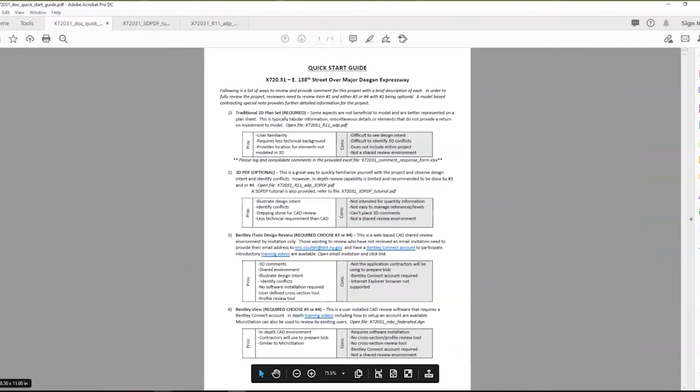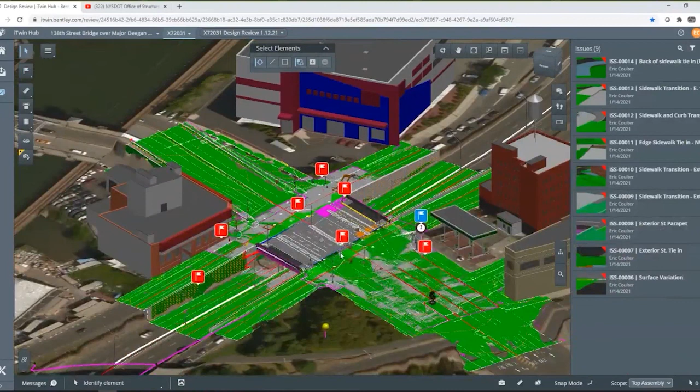Just to give you an idea of what you're going to be looking at when you get in here, I'll hit on a couple of these things. This one right here is going to toggle on your issues. So this is how you're going to come in here, find something you want to make a comment on, and place an issue, and that's what you're seeing here with these flags.

So these are all comments that I've made in here on this project. It'll list them all here on the side. If you don't like to see those flags, you can turn them off. You can turn them back on, and you'll start seeing everybody's comments start populating in here. Right now, I'm the only one that's made comments on this project so far for NYSDOT, so that's why you're only seeing mine in here.

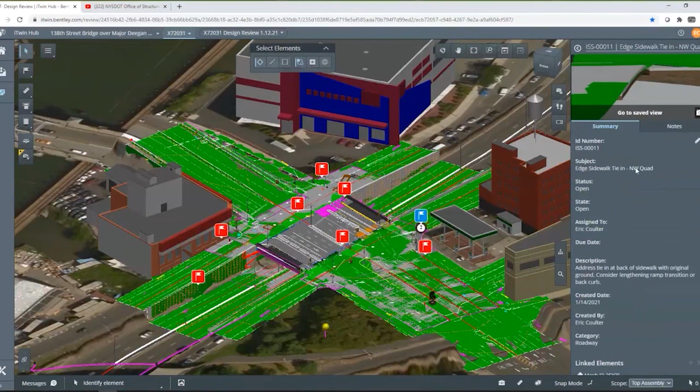But if I want to see specifically what I was commenting on, I can go take a look at it. So I just place the comment here. It'll create a saved view of your comment, showing what you were looking at when you made the comment. I've got a description here of my comment. I can go back and take a look at some of these other ones I've made, and I can place measurements in my comments when I create my saved view. It's just a good way to convey this information in a shared environment.

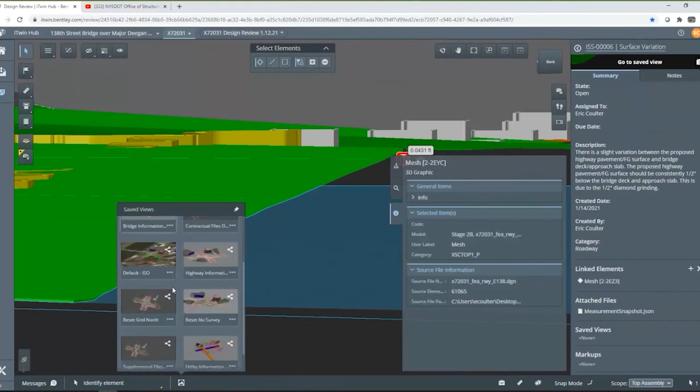We do have some saved views in here. These are not all of the saved views listed in the special note, but there are a few in here just to help you get oriented. So this is just all the bridge views right now that I'm showing here. I can turn these markers off for some clarity. Some default view, just an isometric view, got some highway information, utilities, and of course once you get upside down and inside out, you can come back and hit your reset grid north view.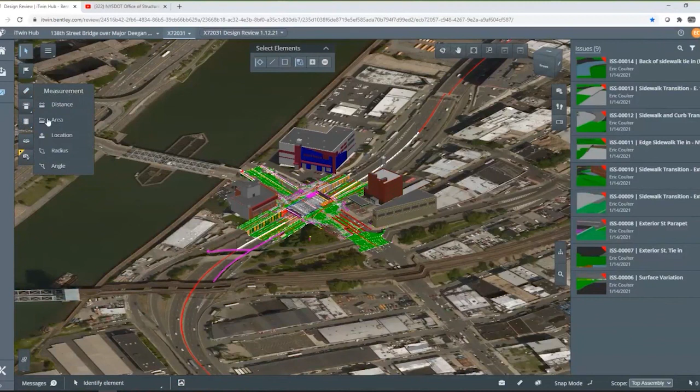There's some tools over here, and we'll go into more detail on this in the training videos, but just to run through them real quick, you've got your measurements. So if you want to come in here and pull some tape and get some angles and areas of certain shapes, you can do that. You can cut some sections. You can view a profile of a roadway, which is a very powerful tool and something that you can't get from Bentley View. So that's another reason why we wanted to pilot this.

You can cut some cross sections. You can just come in here, if I go to like a top view, I can just do a 2-point cut, cut a cross section. It'll take a second to load up here, but there's my section of what I just cut here. And one thing that's nice is you can move this around and it'll update that section.

You can measure in here, and then you can also create a comment from this view as well. So that's pretty handy.

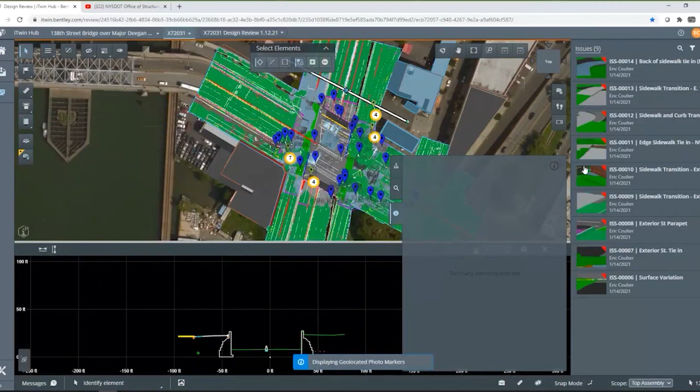One thing that's neat too is, you have to be in the top view for this to work, but there's some geo-referenced photos in here from a site visit we made to the project. Once we load that up, we can close that. We can minimize some of this to get it out of the way.

Where'd they go? There we go. And I can just come in here and click on these, and they're geo-referenced photos. So this is what we were looking at when we took the photo.

It'll create a new tab each time, so you'll just have to close that out to get back in the model. But you can go ahead and check some of these out if you want to get a little bit more familiar with what the project looked like at the ground level.

These are your rotate commands in here. You can just come in and grab a point and rotate, and you'll see what I mean with these geo photos being in the top view. I can just turn those back off.

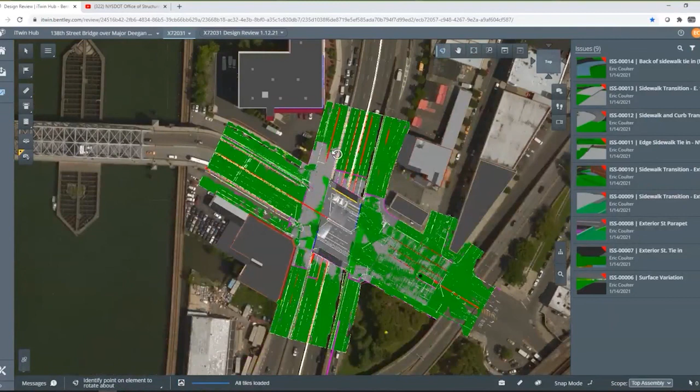There's a fit view, there's previous views. You can just hit this to get back to a quick top view. You can use this tool to kind of walk around, walk through the model, fly through the model. They have different options here.

Over here we have our model tree, similar to in Bentley View, where you've got your references. That's basically this dialog here. This is under your model tree, and you can turn things on and off.

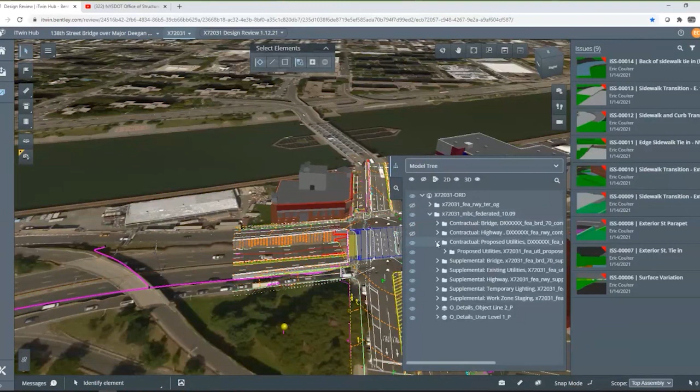So I can turn off the original ground. I can come in here and turn off - these should look very familiar from what Zach just showed you. So you can start turning off some of these and expanding out some of these model trees as well. So like the buildings would be under here. I can just turn those off if I don't want to see those.

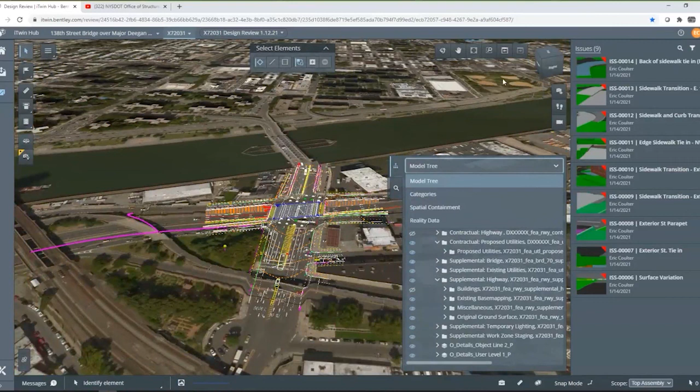Let me get back to the top view. I'm just going to go reset my view. Grid north.

And you'll see that we have this, it's called reality data, where it's bringing in a Bing map. You can turn that on and off in here as well, if it loads up here for me.

And you can change that as well. I had the aerials shown, but close that back up. There we go.

So I have that turned off. I can turn that back on. You'll see these three little dots here, so I can change this. Right now I'm in a hybrid view. I can go to just an aerial view or a street view.

So that's handy, and you can also turn on the terrain. So that's just pulling in some USGS terrain, just like you would see in Google Earth.

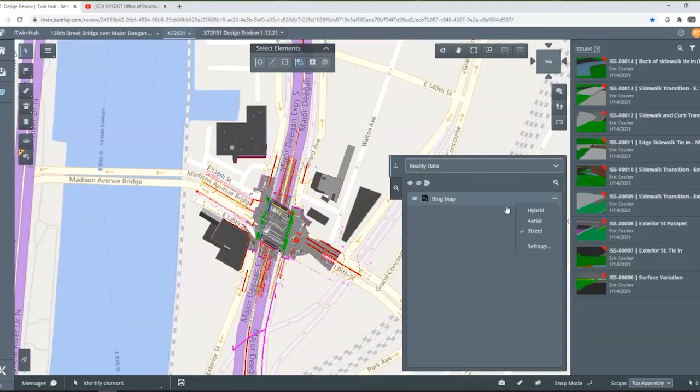So when you rotate, you'll be able to see. Let me just rotate this. You'll see some terrain associated with it. So if I zoom in here, you'll see this is elevated.

Another tool you're going to want to use is, if I click on an item here, let's zoom in here to, let's say, this barrier. It's going to give me the properties, and I can just click on that, and it'll tell me more about this individual item here. So just some additional information there.

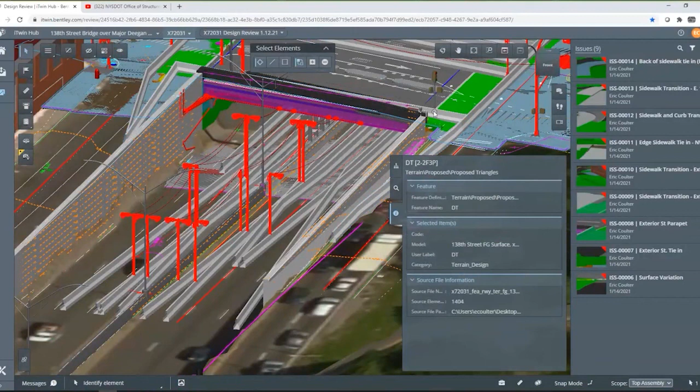But that's pretty much the iTwin, just a quick overview of it.

I'll just show you how to create an issue here. So you can just come in and click on something and you'll be prompted with a form. So this is what it's going to look like.

So I'm in a NYSDOT internal review - I'm calling them a silo - so like New York City DOT, you'll have your own form. So that'll pop up, but it'll look just like this.

You can type in your subject, what you're seeing, what you want to comment on. You can assign it to a category, and this will help us filter the comments on our end for when we go to resolve comments. So you make your description, and you can upload a file if you want, some supporting record plan information, for instance, and then you hit save and it posts your comment similar to these.

So I think that pretty much covers the 3D PDF and the iTwin design review.

One thing I'd like everybody to try: it's pretty easy, just click on a link. Once you get a Bentley account set up, whether for Bentley View or iTwin, you only have to do that once for either program. So if you've already set it up for Bentley View, just click that link and it'll bring you right in. Just a reminder, you have to use Chrome browser, it will not work with Internet Explorer.

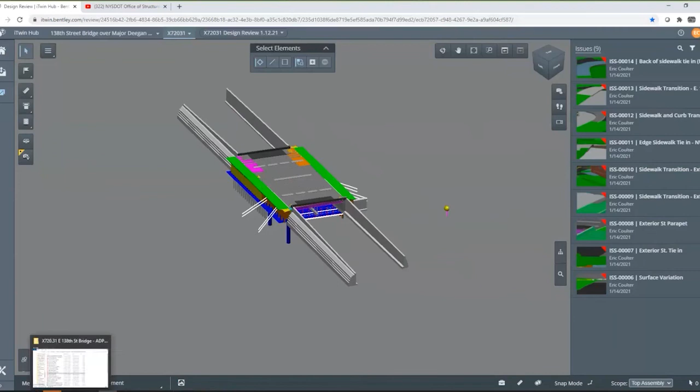It is a lot of information. I think one of the things to keep in mind is just focus on something small. It's a lot of information when you get into the CAD environment, so focus on a small area and turn things on and off, and I think that'll help you out with your review.

All right, thank you very much for showing those, iTwin and the 3D PDF, Eric.

Lastly, I wanted to show the video that our consultant on the project, our teammates at GPI, put together for us. The staging on this project is pretty sophisticated. I think the bridge is being replaced in 5 separate stages alone, and then likewise there's another 5 stages for the Major Deegan and reconstruction taking place below. I know a lot of times, specifically for me, when I'm reviewing a new project and looking at all these different lane shifts and work zone traffic control plans, it's kind of difficult to orientate yourself and figure out what's actually taking place in each stage.

So I want to show you this video real quick. I'm just going to go through the first minute. There's an MP4 of this provided on the FTP site, and there's also a link to this same video on YouTube. One quick thing, if you pull up the YouTube video, I'd recommend you go to settings and turn the quality up to the maximum possible. For some reason it defaulted to the minimum when I initially pulled it up, and it didn't really look too good. So I'm going to go ahead and play this video.

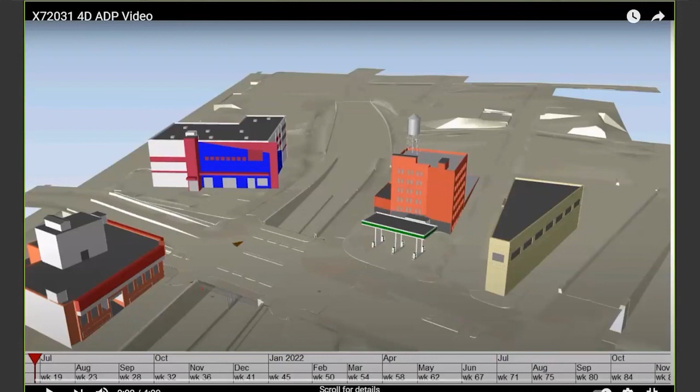We were viewing north, you can see where the buildings are. We're rotating down now to a southern section. You can see the utilities being installed there to the right. We can see stage 2A and 2B taking place. We have the inset on the top left. You can see we're doing some pile driving operations. We're working off the existing bridge deck by way of the excavator and pile driving equipment on there. We can see the right side, we just excavated out. We installed piles now, and we can see some of the temporary lighting configuration going in up top.

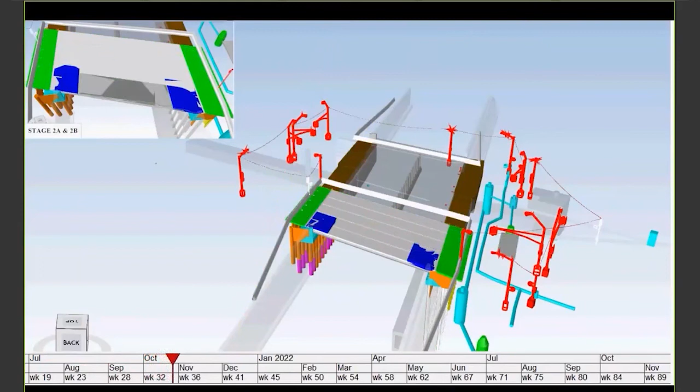All right, we removed the existing bridge deck along with the pier in the center. It looks like we got our bearings going in. We have our prefab deck slabs going in. You see the crane, we have our curb ramps going in there. Approach slab going in there. And our bridge barrier, and that's going to be the final step in 2A.

And you'll see this just continues throughout the whole process of construction. Like I was saying, it is fairly sophisticated. It's not just one of those where we're slicing the bridge down the half and simply building in 2 stages. There's a lot more to it with this being such a heavily trafficked area. I would recommend taking a peek at this before you begin your review or as part of your review. I think it's very valuable, and we plan on using this for other avenues as well, such as public outreach, so that we can demonstrate what's taking place in construction and show the public the types of shifts and closures that are going to be required.

But that pretty much wraps up our presentation for today. I hope everybody was able to take away something from this, and you feel that much more comfortable in your review of this project. Like I was saying before, definitely feel free to reach out to Eric and myself.

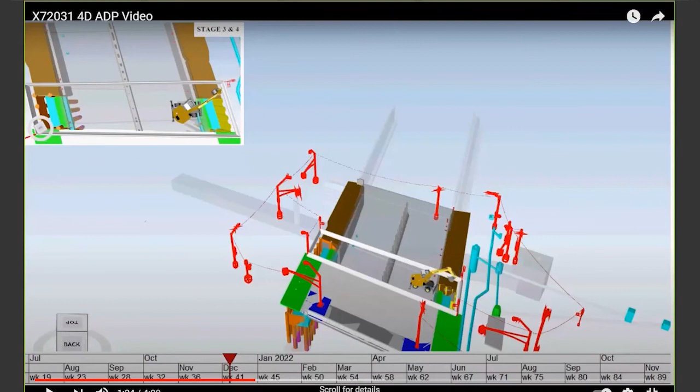There's a lot of information here and there's a lot going on, so we know that people are going to have an issue, even maybe downloading software, and we want to make it as easy as possible. We want to try to ease those burdens of growing pains, and the more feedback that we can get from you guys, the better, not only on the project but on the model-based contracting delivery method as well.